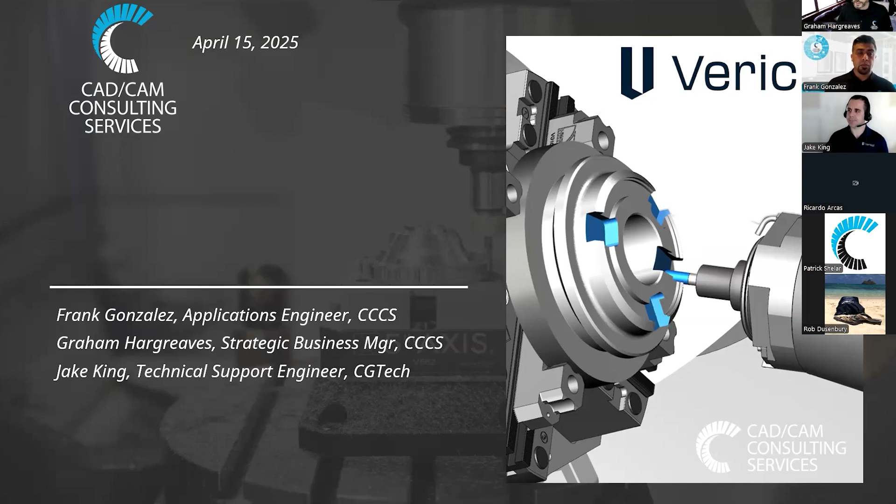Okay, so today we're going to talk about Vericut, Vericut Force, Optimizer, and how Vericut works with Mastercam. So we're going to do a little intro and overview, who we are, who Vericut is. Then we're going to jump in with Jake to talk about Vericut as a company and Optimizer. Then Frank will take the reins and start talking about Vericut and how it interacts directly with Mastercam. And then we'll do a little closer. So as mentioned, we're going to talk about all those products.

The thing that's very special about this is it's two proven industry heavyweights working together to help you achieve success in whatever you do in manufacturing. And we are offering these products locally through CAD-CAM Consulting Services. So a little introduction, Frank Gonzalez, he works in applications for us. Myself, I am the strategic business manager, and we have Jake King, technical support engineer with CGTech Vericut.

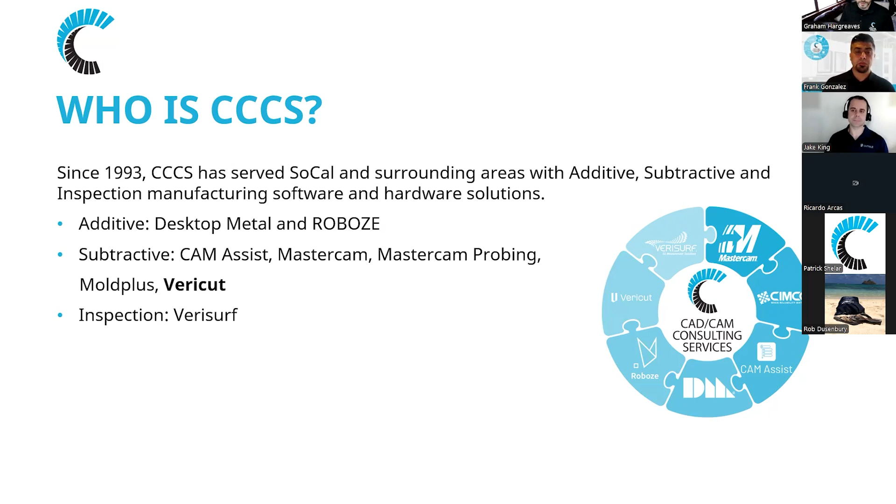Who is CCCS? We've been around since 1993 in Southern California and surrounding areas. We're providing additive, subtractive, and inspection software and hardware solutions for manufacturing. On the additive side, we have Desktop Metal 3D printers and Roboze. On the subtractive side, we have CAM Assist, which works in Mastercam. Also Mastercam. Mastercam probing, which if you see the little icon over here on the top right, that used to be CIMCO, but it was just acquired by Mastercam recently. We also sell Moldplus and, of course, Vericut. Then on the inspection side, we have Verisurf.

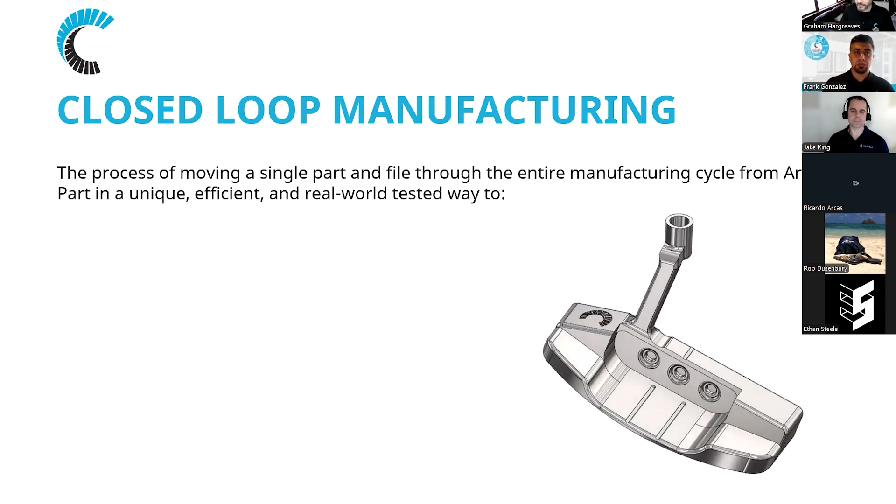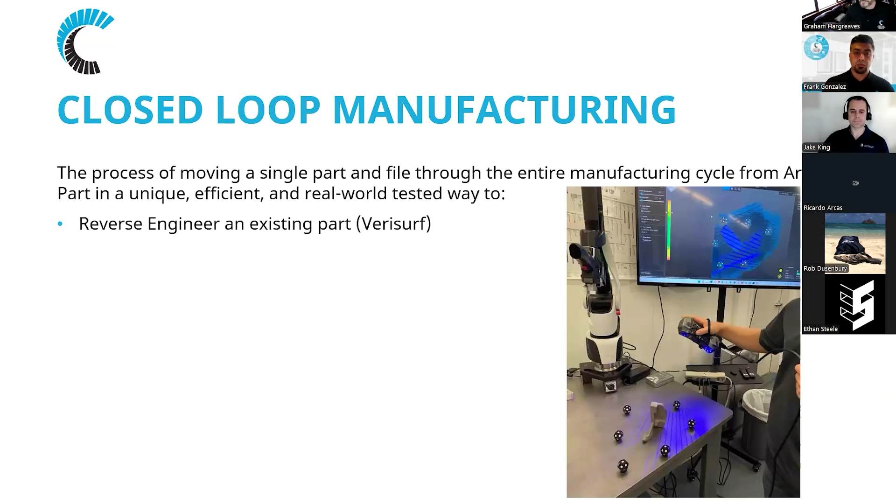So real quick before I pass this over, I wanted to talk about our closed loop manufacturing concept that we've kind of been rolling out over the past year. It kind of encompasses all of our products, and it's taking a single part and file through the entire cycle of manufacturing from art to part. It's a unique, efficient, and actually real-world tested way to take all these products and apply them. So with that putter that you just saw, we reverse engineered it with Verisurf. We actually made some changes and then printed it in stainless with Desktop Metal. And then taking a look at what Roboze does, they print plastics and super polymers, like carbon-infused polymers.

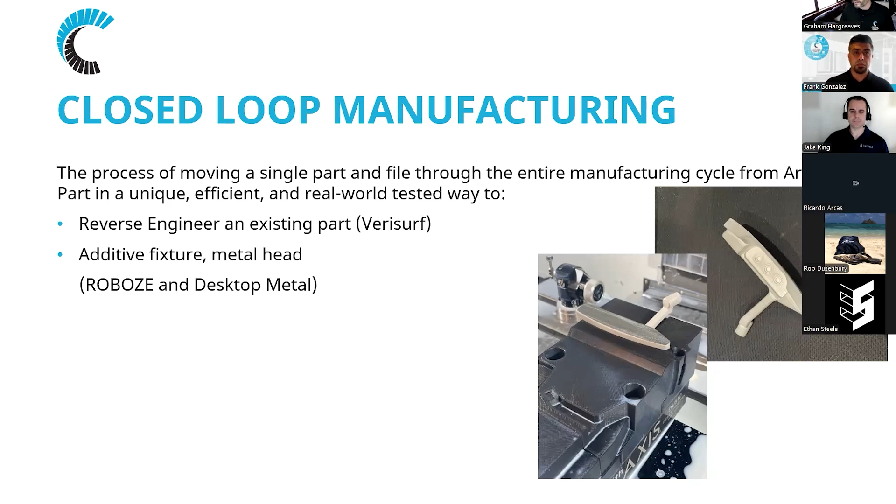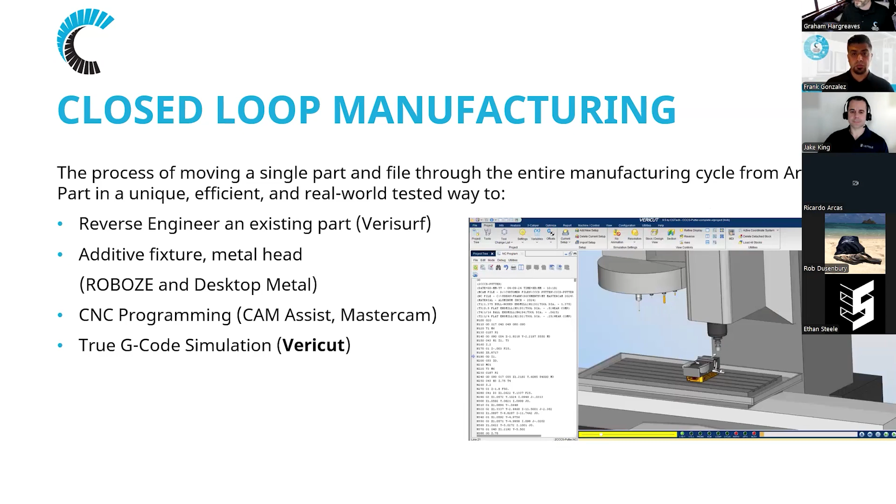Sometimes you need some interesting fixturing, and that could be tying up your CNC machine. So we took carbon PEEK and made some fixturing to hold that unique shape of the putter when we wanted to finish it. It held on really well. It has pretty good tensile strength in that material. So then obviously we program this in Mastercam. We can do our preliminary programming with CAM Assist. We bring it into Vericut for our simulation to make sure we know exactly how it's going to run on the machine.

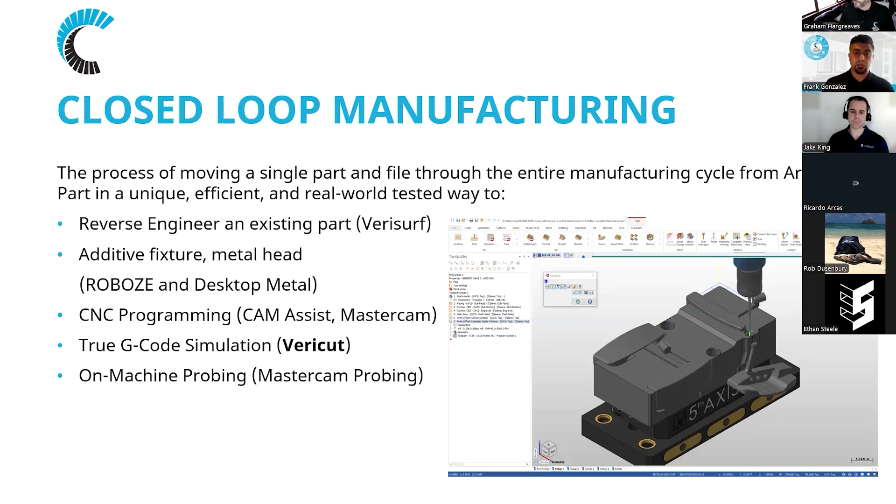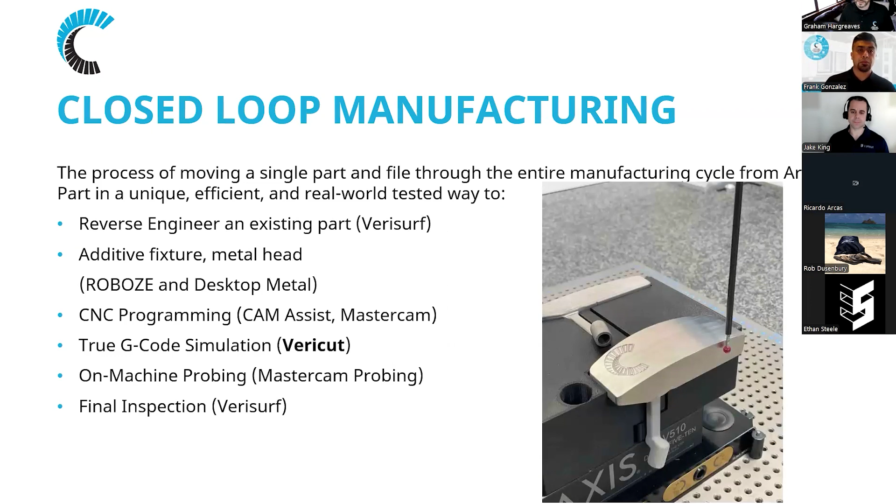And before, during, and after, probing was done with Mastercam probing, formerly CIMCO. Then once we were done, as you can see, these are real pictures. We definitely did this. We did our final inspection with Verisurf to make sure everything was good, and we can go and hit the links with it.

So one caveat there, this will not make you a better golfer. It did not make me a better golfer, but it is really cool. And I love it in my bag.

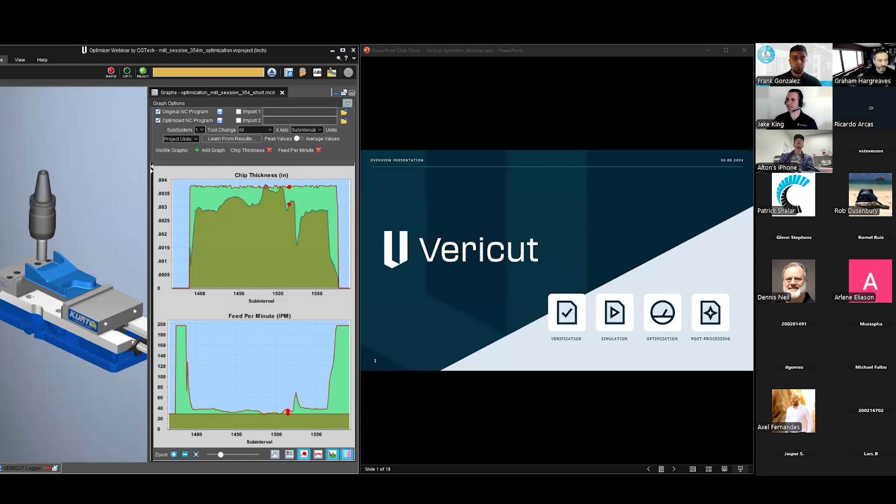Now I'm going to stop sharing my screen, and I'm going to pass it over to Jake. Okay, and away we go. Let's see. All right, you can see it? Yes. Okay. So let me hit reset here.

Okay, so thank you, Graham. I'm excited to be here. Excited to work with CAD-CAM Consulting. I've worked with Frank for quite a while. This is an exciting day for us. This is an exciting product that we're now offering, and so we're excited to get the word out there. I'm going to go through and explain kind of who Vericut is and kind of explain this product and see if it makes sense for you guys.

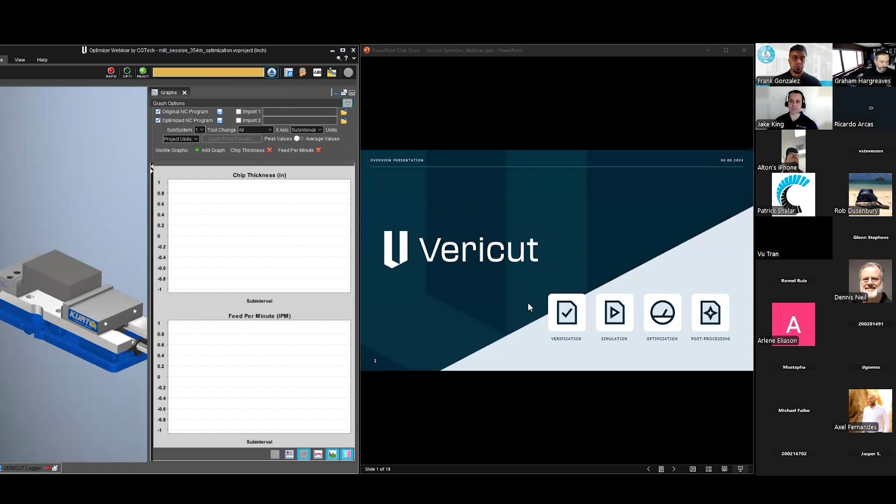So who is Vericut? Vericut, we were established in 1988. So our home office, our headquarters is in Irvine, California. So right down there in Orange County. A lot of you guys are familiar with that area. We have about 220 employees. We have offices in 12 countries. So we're a worldwide company. I'm not going to go through each one of these, but that's just to kind of illustrate that we are growing and we continue to grow every single year.

That bottom right hand section there where it says partner with CNC Software for 20 plus years. We also work with all the different CAD-CAM systems, and we're happy to work with those guys. We're happy to work with the CAD-CAM softwares. We need those guys to work with us. And so we're excited whenever we get to work with somebody or partner with somebody. We always appreciate those relationships.

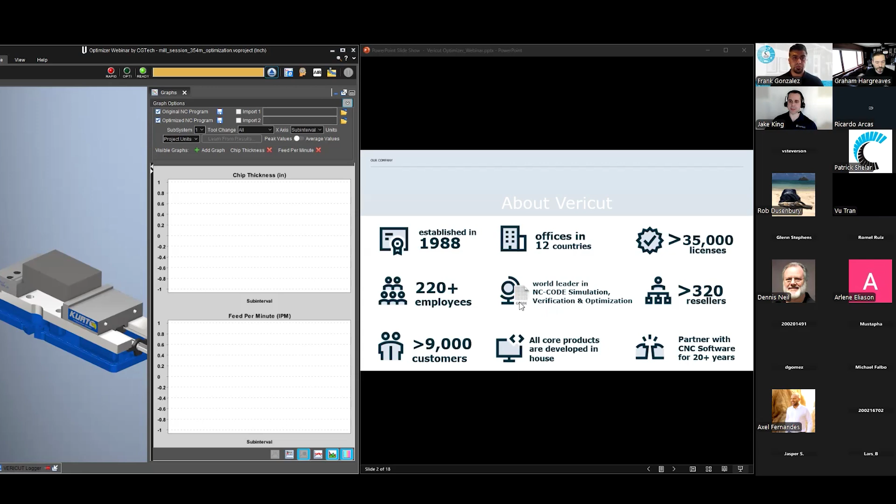Jumping into the products of what we offer. So this far left-hand side where it says Vericut Optimizer, that's what we're going to be talking about today. And I'll walk you through what that looks like and how that would fit into your process flow. The next one is Vericut. So Vericut is the core of who we are. We are Vericut. This was our first product that we made, and it continues to be a strong point for us. We are all about simulating CNC machines, and a lot of that happens inside of Vericut.

The next product that you maybe have not heard of or are not familiar with is VDAF, so Vericut Drilling and Fastening. So imagine some of these robots that are drilling holes and then they're placing fasteners inside of those holes, things like rivets for airplane wings and things like that.

The next one we have is our Vericut Composites applications. So these are growing as well. We have our VCP, so our Vericut Composites Programming side of things, and we have our Vericut Composites Simulation. So this side would be more like your post processor and you're programming these composite machines. And then this side is kind of like Vericut in that we're simulating all of that code that you're feeding into the machine to make sure that everything simulates and verifies correctly before taking it to that machine.

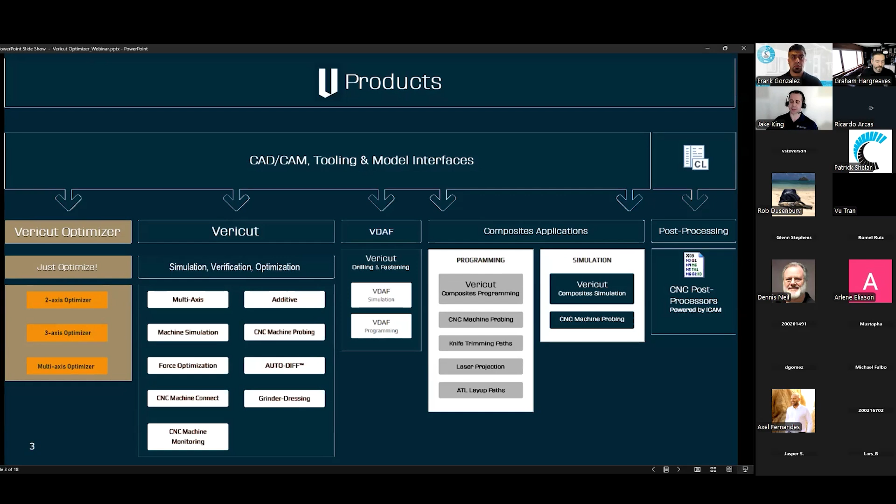The last product that we offer is our post-processing. You can see down here at the bottom, this says that it's powered by ICAM. So we acquired ICAM. So now our Vericut Post, we're able to post using that ICAM software. And so if you guys are interested in that, that's another option that we have where we have a lot of cool technologies where we can post using that software.

Okay, so Vericut Optimizer. This is what we're here for. So it's a standalone application. It's meant just for optimizing, so it's meant to be an ease of use software. It's for everybody, so any sort of CAD-CAM system, as long as you're running G-code, we can optimize it. It's meant to be an affordable option for you, right? That kind of goes back to that no Vericut needed. You don't need to buy a full seat of Vericut. You can just buy Optimizer and optimize your programs.

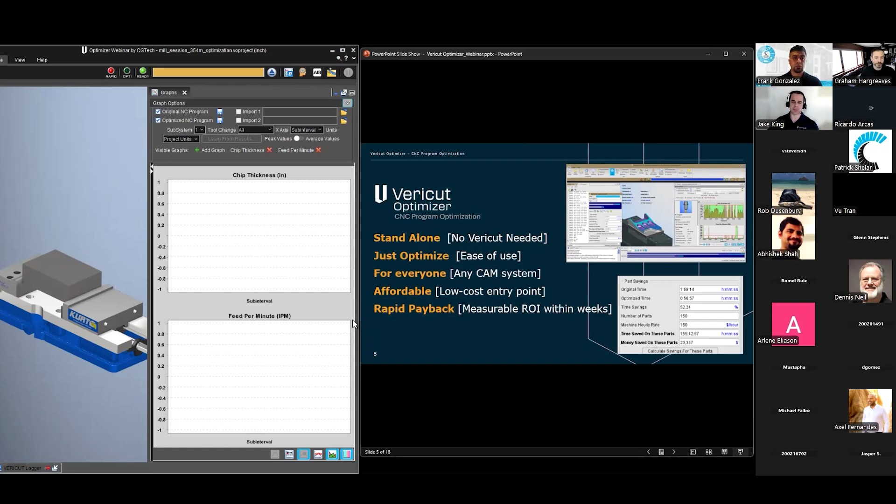And the last part that I'm going to talk about at the end of this presentation is this rapid payback. It's not too often that we come across products where there's a real measurable difference where you can measure how fast a product's going to pay for itself. And this is one of those products where you'll be able to see how quickly it pays itself off.

I'm not going to read through all these bullet points, but the main thing I wanted to show you is that you can optimize APT code like CL data for Mastercam—that would be your NCI code—or you can optimize G code. Any G code you're getting out of Mastercam, you can take into Vericut Optimizer and optimize it. It doesn't have to be new or old programs. If you've got a program that's been running on the shop floor for years and you're looking to get more performance out of it, this is a great product for you. If you're looking to optimize your programs before you even take them to the machine, you can do that too. We accept all G code, new and old—it doesn't matter, we can still optimize it.

Down here at the bottom it says we've got detailed tool use and graph windows. I'm going to show you what that looks like inside of Vericut Optimizer.

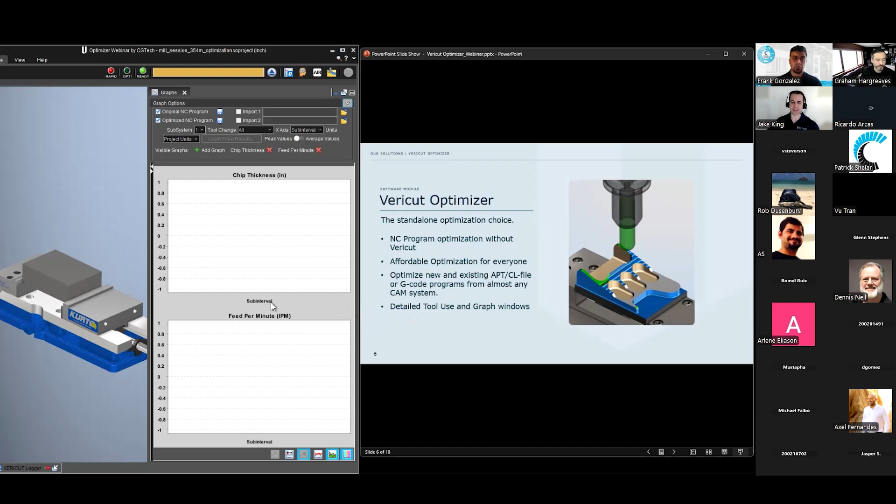So why is optimization needed? This is a great conversation. One of the coolest things about my job is that I get to help teach people concepts or things they may not be aware of. This is one of the neatest things inside Vericut and Vericut Optimizer—these graph windows. As we're cutting inside Vericut and Vericut Optimizer, we're able to take measurements all along the way and give you that data back. This is a good tool for you to get feedback on how your programs are doing and where you're at in your programs.

So think about this part right here. I've got this aerospace bracket up on this part of my screen, and you can see this end mill—this is looking from the top down view. We're going to go around this part and finish it, or maybe we're roughing, doesn't really matter. We'll see a thinned chip thickness up here on the straightaway, as we go on the outside edge.

And then what do we do? We bury that tool in this first corner and bury it in that second corner. There's not a real good way to fix this, right? We kind of have to finish that part—that's how we finish it, or that's how we rough it out. As we bury that end mill into those corners, we see this big load-up on chip thickness. So what that's doing is beating up our tool. We might see chatter, we might break a tool—we're stressing that tool out in those inside corners. So what do we end up doing? We end up picking a feed rate that satisfies that worst case scenario. We take the feed rate and bump it down, and we're like, okay, it made it through those two corners, and that's the feed rate we chose.

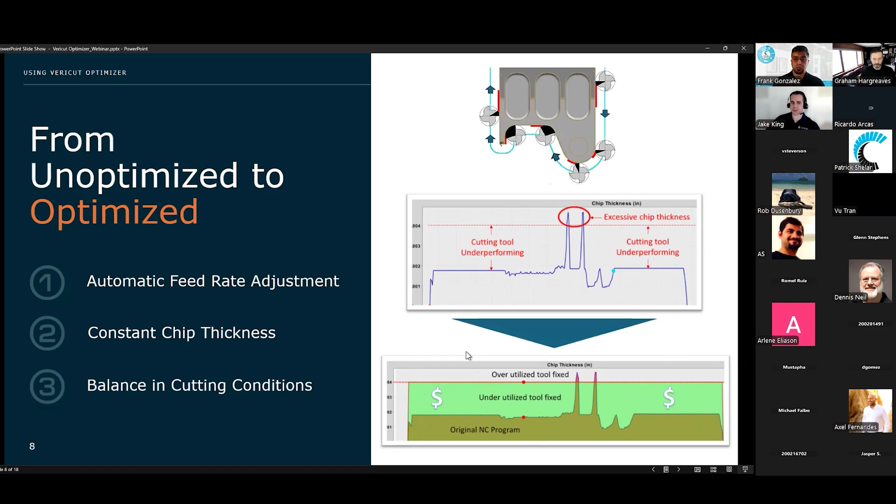So in Vericut Optimizer, you can see down here I've got these dollar signs. If we could push that chip thickness up to like that 4 thousandths chip load throughout the whole program, wouldn't that be great? Wouldn't we be able to get a faster program? That's exactly what Optimizer is doing, and I'm going to show you guys exactly what that looks like and how it works.

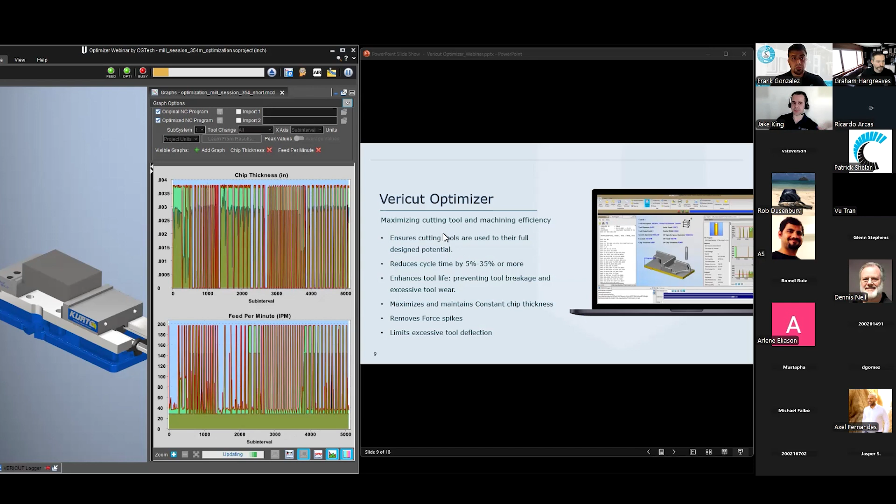Okay, so I'm going to go ahead and kick off this Optimizer right here, and you'll see these graphs populating. Some of the key points with Optimizer, and with machining in general, is we want to make sure our tools are cutting at the top end. If a tool manufacturer tells me an end mill wants a chip thickness between 3 and 5 thousandths, I want to be running in that range as often as possible. That's going to do two things for me: give me the best tool life possible in that range, and also give me the fastest program possible. So those are the two main points I want you guys to think about—chip thickness gives me better tool performance for the life of the tool.

And it also gives me a faster program, which I want. I want to get this part off my machine as fast as possible so I can make more of them or get on to the next job. We're all here to do the same thing—we're here to make money in those machine shops, and we do that by being as efficient as possible. And that's why optimization is needed.

We can reduce cycle times by 5 to 35%, and actually have seen more depending on the CAD-CAM system. If we have really inefficient programs to begin with, we can squeeze even more juice out of these programs. We can prevent tool breakage and limit excess tool wear on our machines by maximizing a constant chip thickness.

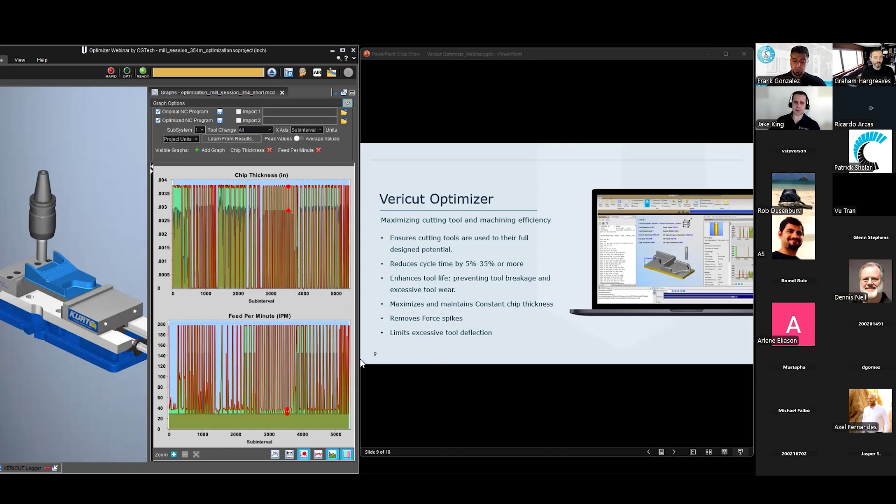The third big point I like to talk about with Optimizer is that we get to make safer programs as well. So I'm going to demo this for you and show you how we get this third benefit out of Optimizer. We can limit the amount of excess tool deflection, forces, and horsepower that we're seeing on our tools and machines, and I'll show you exactly what that looks like.

Okay, just to run through this real quick, this is a different way of thinking about your program, seeing it on a graph versus taking it out to the machine and listening to it or watching it run. This is what we typically see in our programs: I've got a feed rate of 25 inches per minute, constant throughout the cutting portions of the program. My chip thickness varies depending on the conditions my part or tool is seeing. What Optimizer is going to do is basically flip these two graphs.

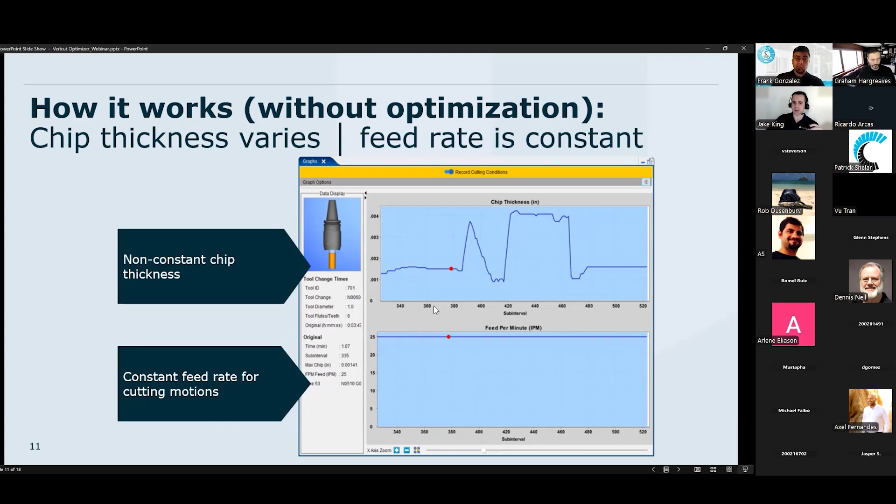Okay, I'm going to leave that up. I've already optimized this program. I'm going to jump into Optimizer and show you the same thing again to reiterate the point. I'll zoom in on this portion of the graph, and temporarily turn off the optimized portion. So as I was running this part, cutting it, this is the condition I saw - the chip thickness varying with a constant feed rate. I can slide this over here - a constant feed rate of 29 inches per minute with this particular tool.

Turn on the optimized and turn off the original for a second. It's not a perfect flat line, but it's very close. You can see as I drag this little red ball around, my inches per minute, my feed rate, is varying, but my chip thickness is more constant. This is what I'm after right here.

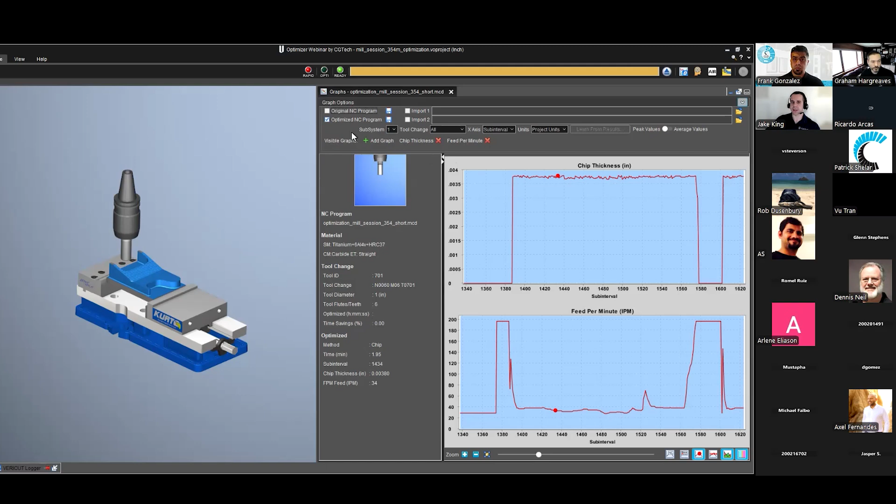If I show you both programs, top and bottom, overlaid on each other - this green section here is a gain, where I've been able to push my program up higher. If you see a section that's red, that's where it was pushed down. The green in between is gains - that's where we were able to go faster.

I was able to get that part off the machine faster by maintaining a more constant chip load, and also get better tool life by keeping that tool where it's supposed to be. If I run too low, I'm going to rub that tool too much and wear it out prematurely. If I run it too high, I might stress the tool out, put too much heat into it, and end up chipping, breaking, or wearing it out. So that's how we do it.

That's the whole secret sauce behind Optimizer - we are all about chip thickness. So keep that in mind when programming your parts or considering buying Optimizer. But there's more - remember that third leg I was talking about, where we can also make safer programs. Looking at this same section, I'll show you a bit more. Let's turn on power for a second.

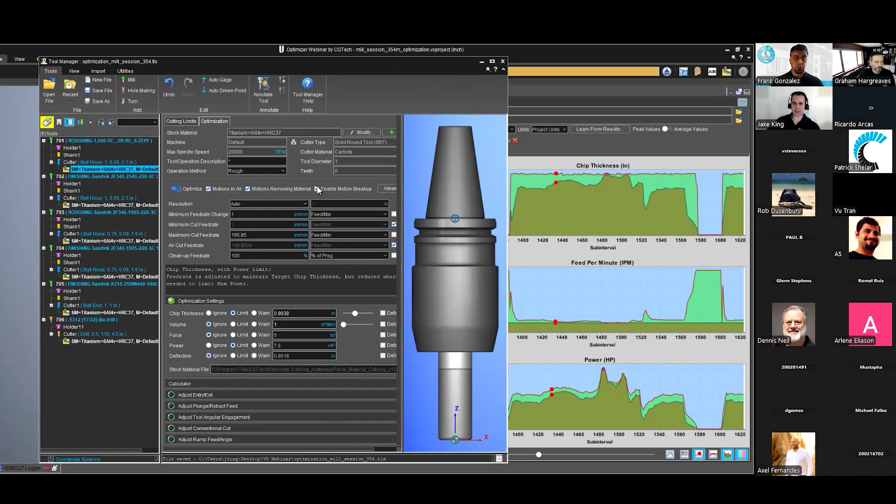Maybe I want to limit some of these spikes that I'm seeing in my program as well. So I'll go ahead, turn that on to limit, and set it to 7.5. Save that, and I'm just going to re-optimize this program real quick.

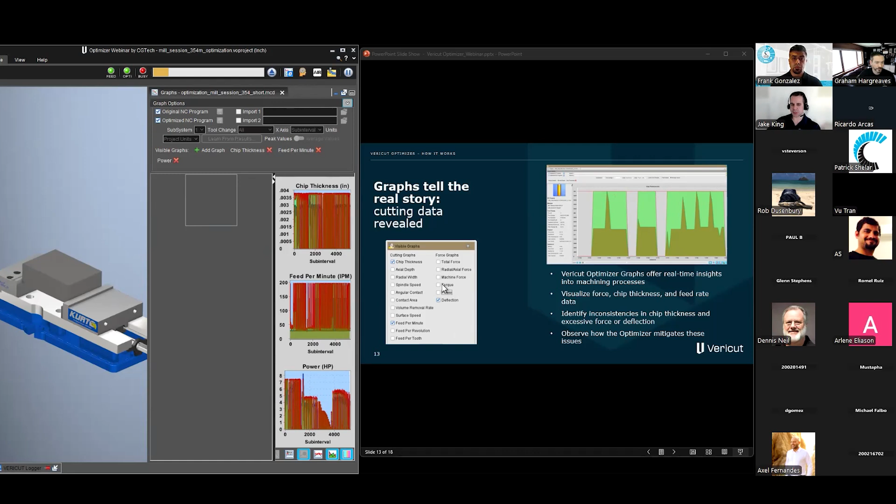And there's more. Inside those visible graphs, there's deflection, power, torque, machine force. You can split out the forces between radial and axial forces as well as total force. So there's lots of different options. You don't have to use all of them, they're all optional. Remember, our main thing that we're after is chip thickness - we're always driving after chip thickness.

If I turn on my limits right here, you can see where I've set these limits. Vericut is always going to try to push up to that limit, but it doesn't want to go over it. So we don't want to go over the chip thickness value I've set, and same thing with the horsepower.

So if I zoom in on the same section we were looking at, you can see I've got this limit right here. What did Vericut do? If I zoom in right there, you'll see - it actually cut my feed rate down in this section, which also drove my chip thickness down temporarily. But it made a safer program in that now I'm not pulling so much spindle load when cutting in this section.

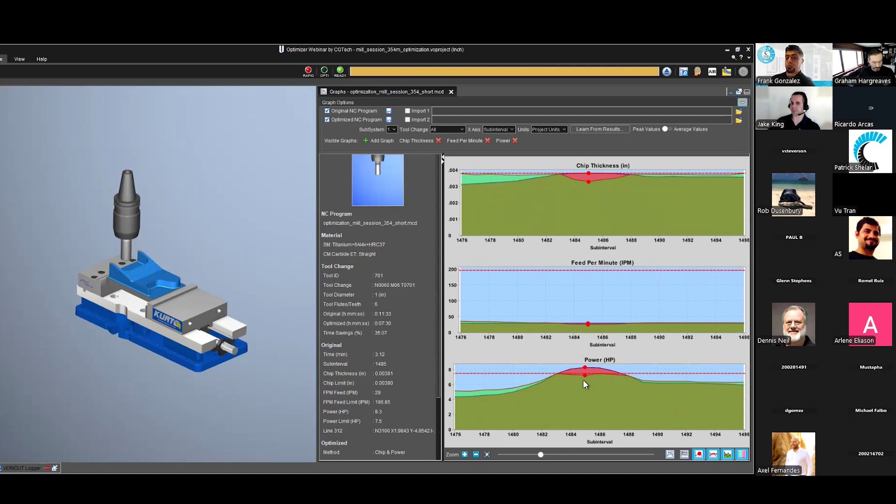If I back out and zoom out, I was still able to see lots of different gains in here. If I turn on my optimization calculator, you can see I was still able to save 35% cycle time on my program, even though I had this small section here where I cut it down. So that's the third thing we offer - that's how we get to a safer program.

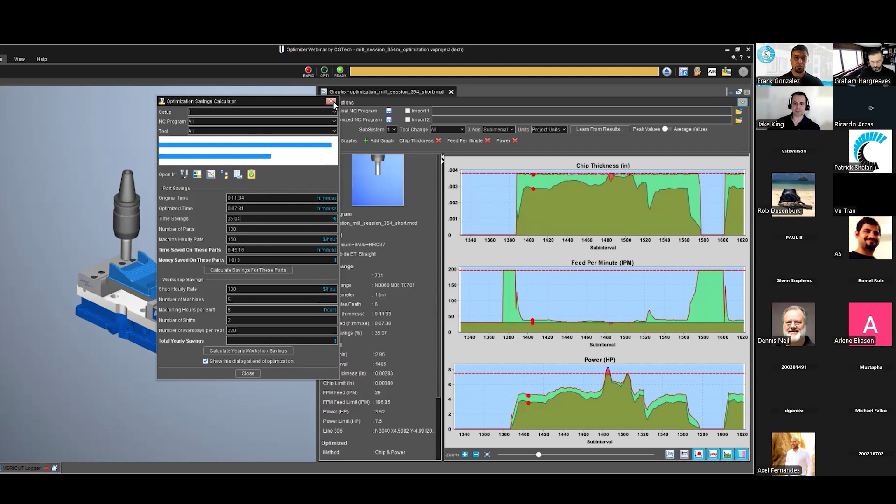So these graphs, I have to be careful when I talk about them. When I first started looking at these graphs, I thought this was really cool - I still think it's really cool. It's something where nobody has shown you your programs like this before. You can run them on the machine, simulate them in Mastercam, NX, CATIA, whatever. But nobody is showing you these graphs like this or showing you this data. It's kind of looking at your programs under the microscope.

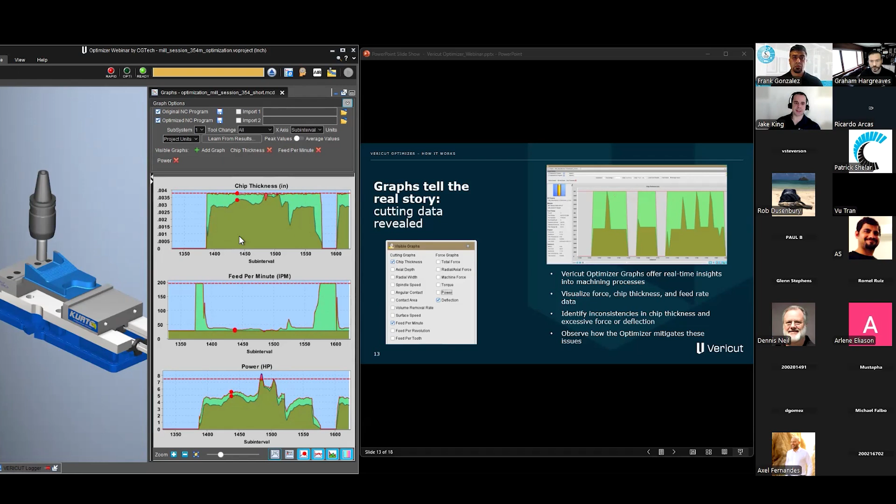And still today, what's really amazing to me is that while we were doing that, while Vericut was running around cutting this part, it was measuring and writing out a new optimized program. So let me go forward here - I talked about this, limiting the forces, the power, the tool, the deflection.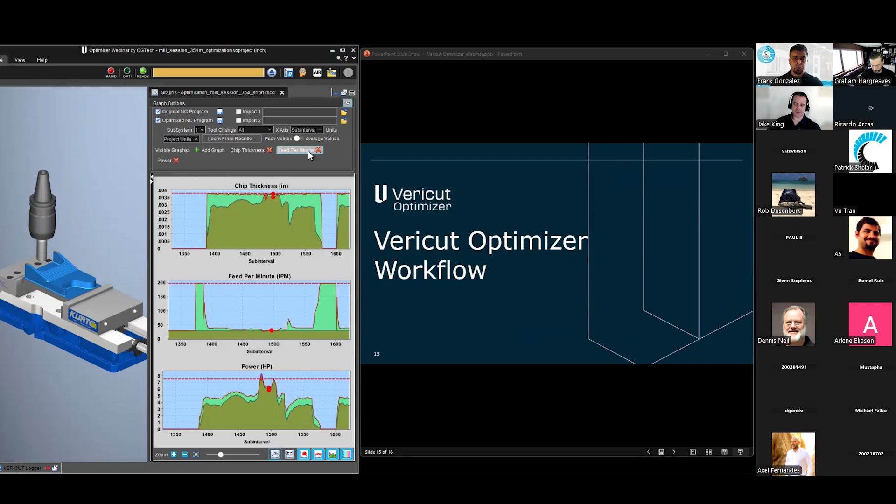Well, and that's another thing too - let me show that real quick since I talked about it. So maybe if horsepower is a harder thing for you to visualize, maybe you look at it more like deflection. If I turn on the same graph in this same area, you can see almost 2/1000ths of deflection at the tooltip is what I was seeing in this particular region here.

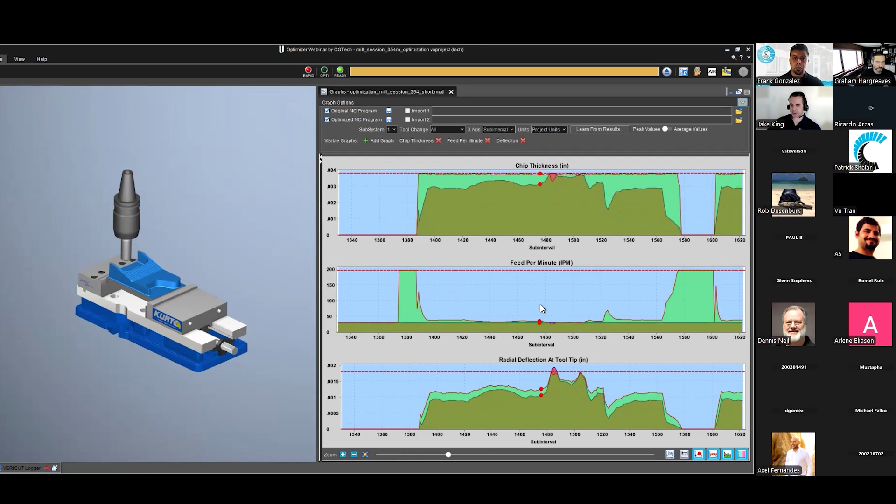I could go back into Tool Manager, and I don't have to use horsepower - I could ignore that and turn on deflection, use this limit I've set up here, and limit it to where Vericut's not going to go over that, 1/1000th, 8/10ths deflection at the tooltip itself. Lots of options. Like I said, we teach an entire class on how to do this and go through all these different settings.

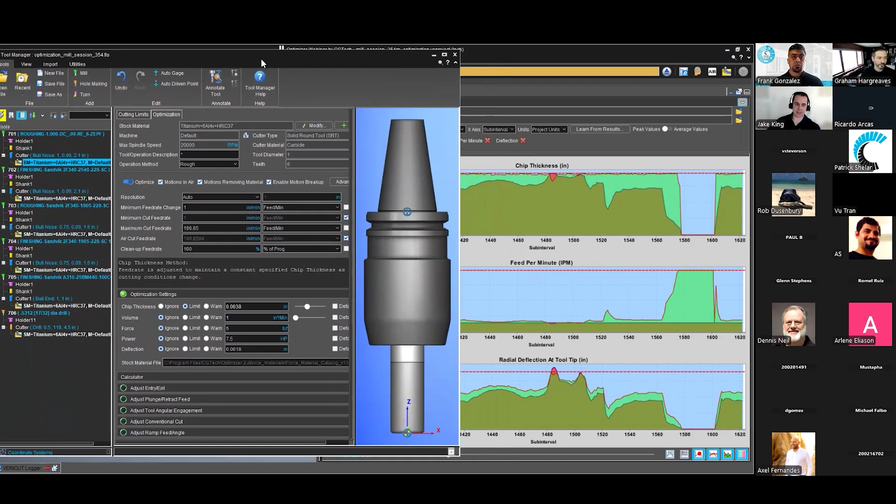Very intuitive, very easy to use.

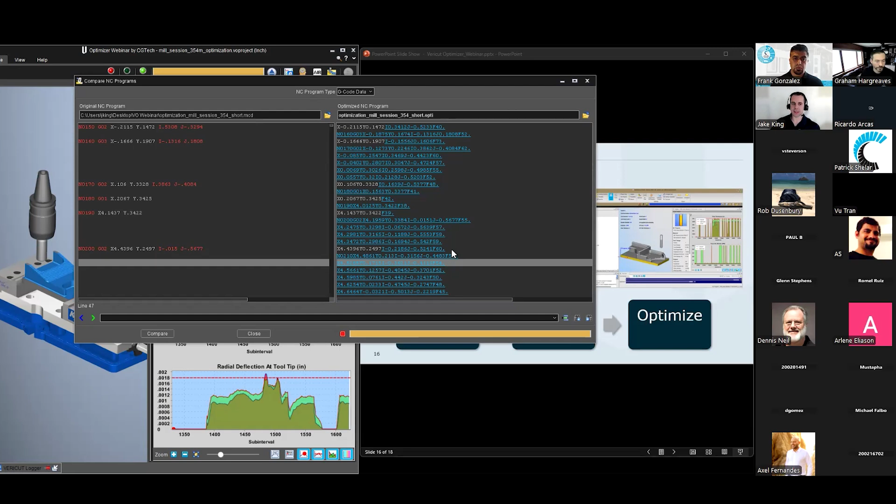That's all we're doing. We're not adding extra cuts. We're not adding in lead-ins and lead-outs. We're not changing the trajectory of your toolpath in any way. We have the ability to cut it up into smaller segments and then apply different feed rates. And we're applying the correct feed rate for the chip thickness that you've told us about.

Okay, so what does this look like for you guys, or how would this change your workflow if you were to use this today in your machine shop? Step one, we're gonna get all of our information out of Mastercam or whatever CAD-CAM system you're using. We've already defined these tools in Mastercam. We've already defined our stock and our fixture inside of Mastercam. So we're not going to redo that work. We're just going to take everything from Mastercam and take that over into Vericut Optimizer.

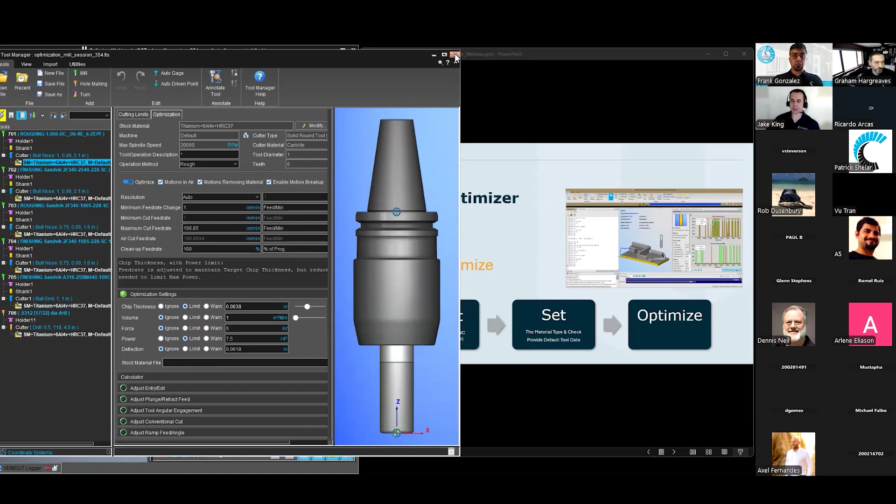Once we've done that, we need to tell Vericut what material we're using. So if I go back into Tool Manager, in order for Vericut Optimizer to correctly calculate the force, the power, and the deflection, you need to let Vericut know what material you're cutting. If this was something like wood, you can imagine the horsepower or the deflection would be much less than something like titanium. So you'll tell Vericut what material you're cutting, and then after that, you'll click on that optimize icon.

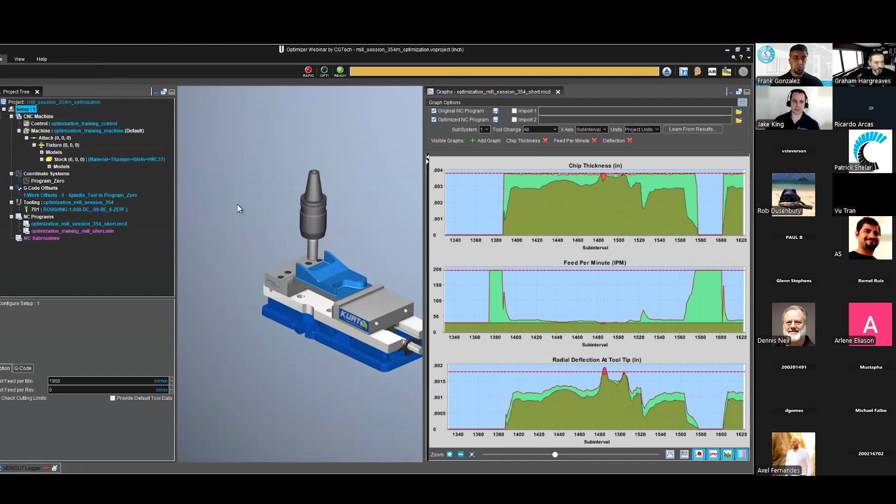So just to run through it real quick. I'm going to show you guys what we call the project tree. I get all of my information from Mastercam. I get my tools from Mastercam, my fixture and my stock from Mastercam. I'm going to post my program just like I normally do. I post it out of Mastercam and then let Vericut Optimizer know where that program is at. The next thing I need to do is let Vericut know what material I have.

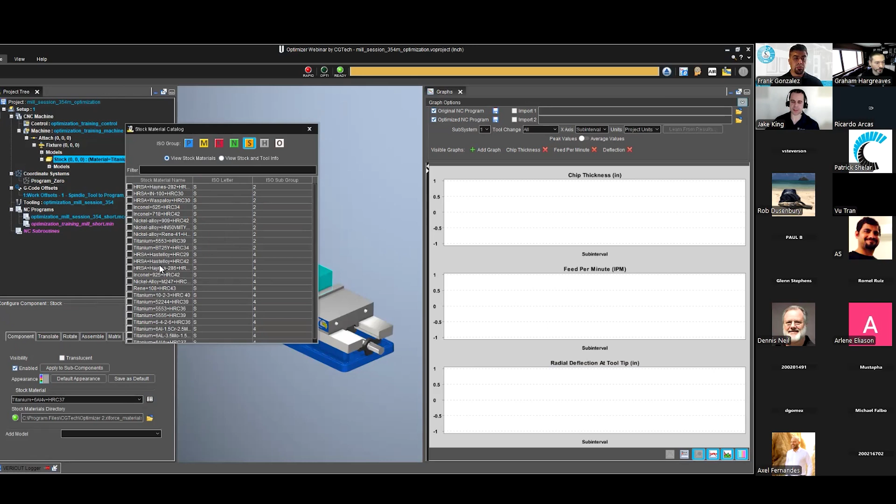So in here, we've got a big long list of materials that you can choose from. I prefer clicking on this icon here. In here, I can sort these materials by their different groups. So I could go to something like my aluminums and pick which aluminum it is, or if it was a titanium alloy or something like that, I could go pick my material. Once I've let Vericut Optimizer know what material I've selected, I'm going to click on the optimize icon and start optimizing my program.

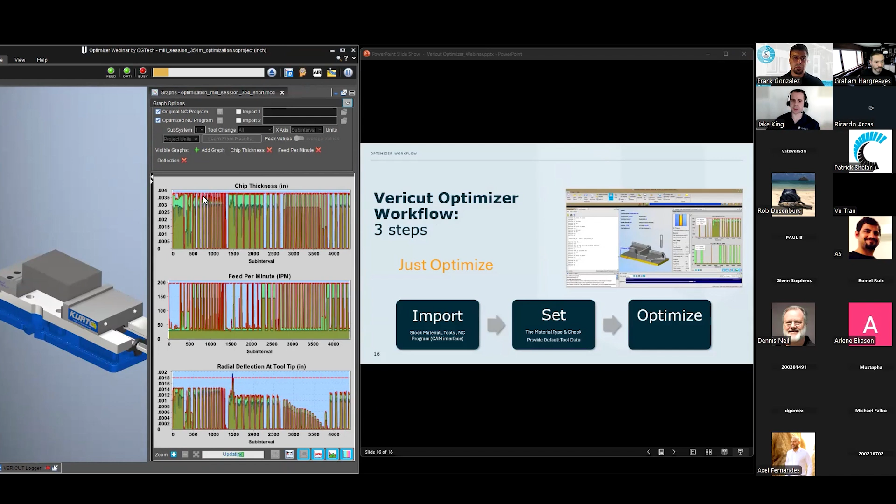Any sort of changes that I need to make, I can go back into Tool Manager and change those different settings like I showed you guys how to do. So maybe I want to push this chip thickness up more. I've seen this a lot with users where they'll optimize the program and they'll say, hey, that ran pretty good. We're able to get a lot more performance out of the tool and out of the machine. Let's push it up a little bit more, right?

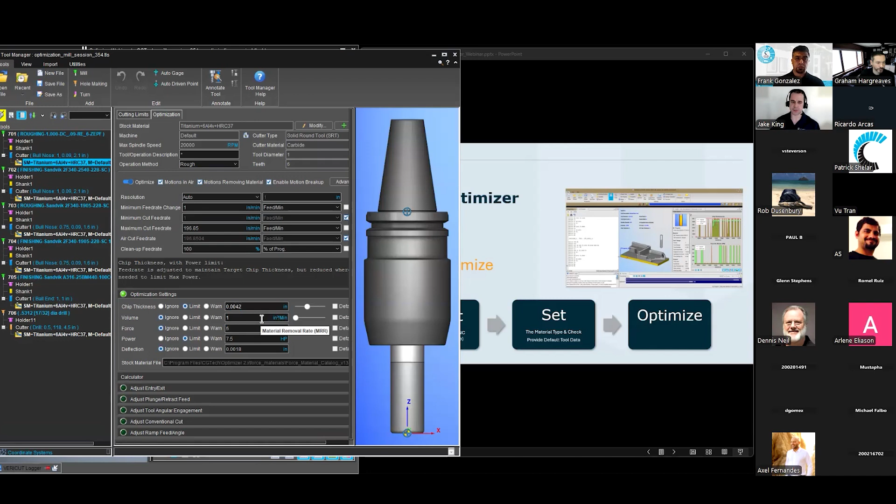So I could go back into Tool Manager and say, hey, it ran really great at that 3.8 value. Let's start pushing that up. Let's push it up to a 4.2. Save my TLS file, re-optimize it, and now I start driving that cycle time further and further downward, and getting more performance out of my tool and out of my machine. So as simple as that, 3 steps.

The last thing I wanted to mention to you guys is this return on investment. Like I said at the beginning, it's not too often where we come across these tools where you can very quickly see how much it's worth and how fast it can pay itself off. I've got a customer that I've worked with quite a bit that cuts a lot of titanium, and he mentioned to me, I can't believe more people aren't doing this, because this thing paid itself off for me in a matter of like a month. It's already paid itself off.

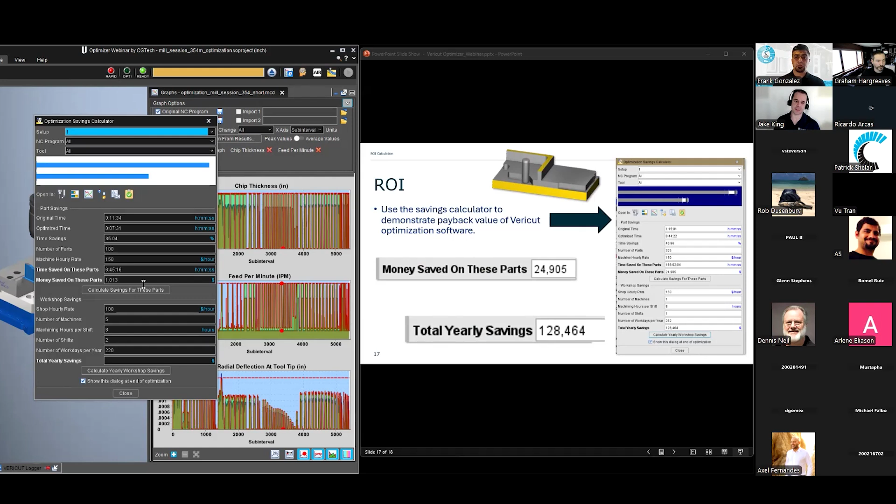But he was cutting a lot of titanium. So you can see my original time was 11 minutes and 30 seconds. And keep in mind, guys, that this is just a roughing end mill. This isn't the entire program. So if I have 11 minutes of cycle time, I was able to cut out 4 minutes. That ends up being about 35%.

If I cut 100 of these parts at $150 an hour, that ends up being $1,000 saved, very quickly. One thing that we forget to mention too is that that's almost 7 hours of free time that I get back, right? If this was on a three-axis mill, now I've got 7 hours, I've got almost an entire shift back where I can go make other parts with this machine tool.

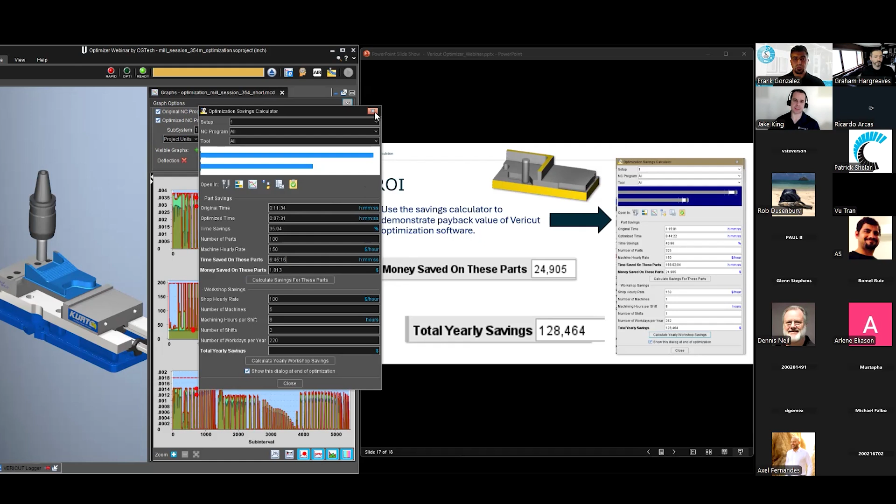So very quickly, this is a tool that can help you guys make better programs up front, safer programs as well. And it's something that can easily pay for itself. So pretty cool. I think it's really cool. I get really excited about our optimization software.

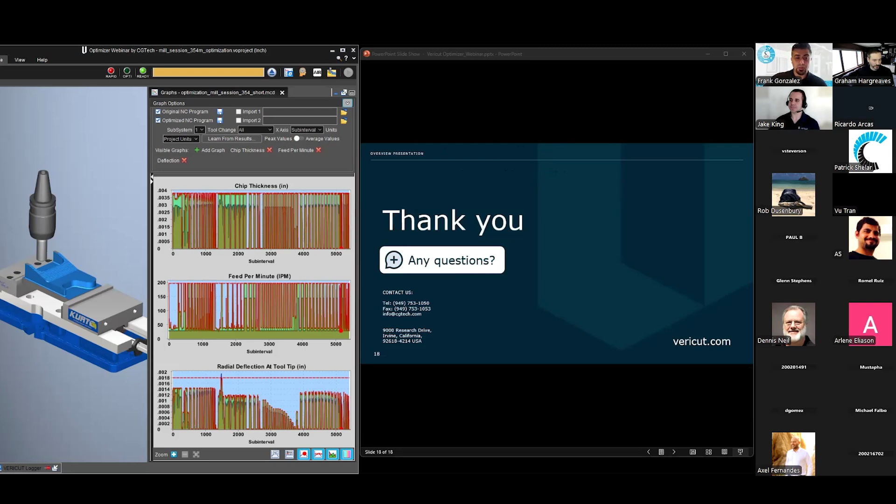So thank you very much. I'll pass the time back over to Graham or Frank, and Frank's going to show you guys the Mastercam to Vericut interface. All right. Thanks a lot, Jake. Yep. Thank you, Jake. So let me go ahead and share my screen. Move this out of the way. Are you guys able to see my screen? All good? Perfect. Yep. Okay, guys.

Well, yeah, so what I'm going to be showing is pretty much the workflow on how to integrate everything Jake just showed in Vericut, bringing it across from Mastercam in this case. This can be done with any other CAD-CAM software. But the workflow here in Mastercam would be the normal things you would do. Come to your stock or your job setup, and you're going to go ahead and define your master model, meaning what's going to be cut, your stock, right? So if I come to my levels, turn on my stock, you can see it in red. This is what's going to be removed, right?

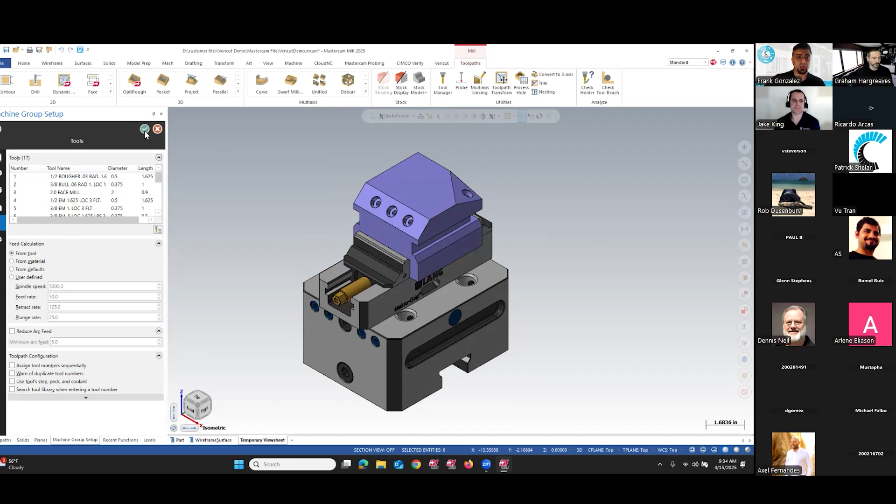And then the next thing we want to select is our work holding, our fixturing. In this case, I have everything. You can see it highlighted in yellow here in a level. And then along with that, your tool library. And this is a workflow that you guys should have already, right? But if you guys are using machine simulation or anything else, it's the same workflow. Go ahead and check mark that.

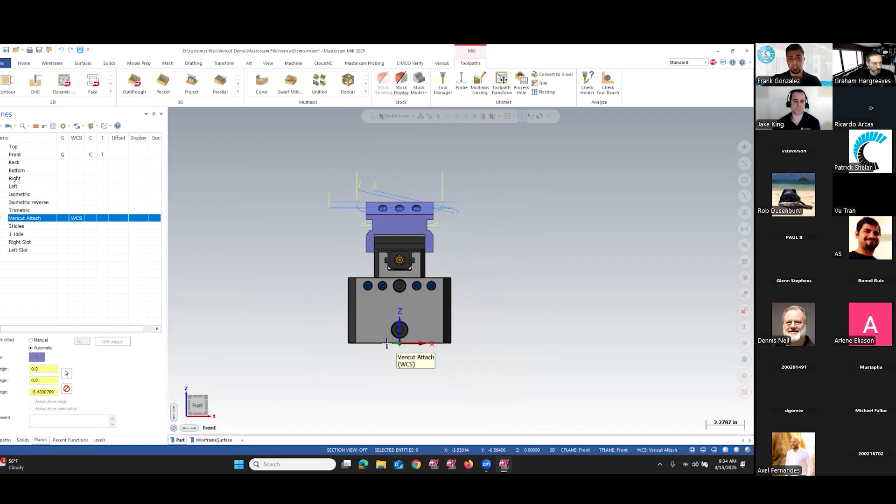And then another thing that's going to be required to be able to import this into Vericut would be creating a plane. So we would need an attachment plane. What that is, is just where do you want to place all our models when we bring this over into Vericut. And if you can see here, my attachment plane's right at the bottom middle of this nice picture. Perfect. Okay, so once we have that, that's pretty much all we need. And again, this is just the normal workflow that you're doing regardless, so nothing really different, right?

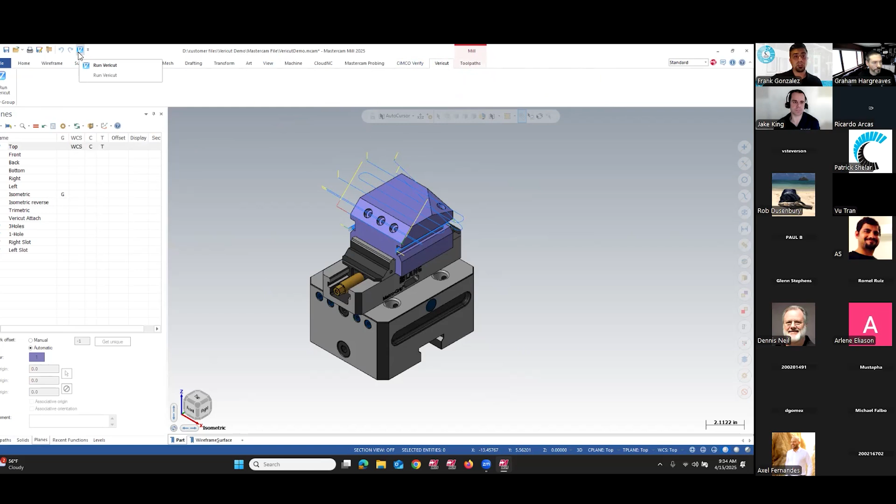And then we go into the Vericut interface, and you could have it in multiple places. I created a tab here for this demo purpose, and I also have it on the quick access toolbar here, so either one would work. So once you go into the Mastercam interface button here, this is what pops up, right? So it wants to know your working directory, so where your project in this case is going to be built. All this information that we're transferring over to Vericut, this is where it's going. And then you want to give it a name. In this case, I'm going to label it Vericut demo.

And then you also want to make sure that you select your project template, meaning what machine you're going to be using for this project, right? And then you just want to put all the operations into a single Vericut setup here in this case. And also, if you have multiple toolpath groups, you could select all or select one only. In this case, we only have one, so all or select only would work. And then we go down like this. The first tab here is a model.

So you'll see that everything that we did on the job setup, from our stock, our model, and our fixturing, everything's being transferred over. If for whatever reason you need to change this, you still can. You have control. You're able to come here, select, and either clear it, add from a different level, or go back into the Mastercam drawing area and select it. And it's the same thing with your design or your model, and then also with the fixturing. The next thing you're going to do here is go ahead and select your attach plane.

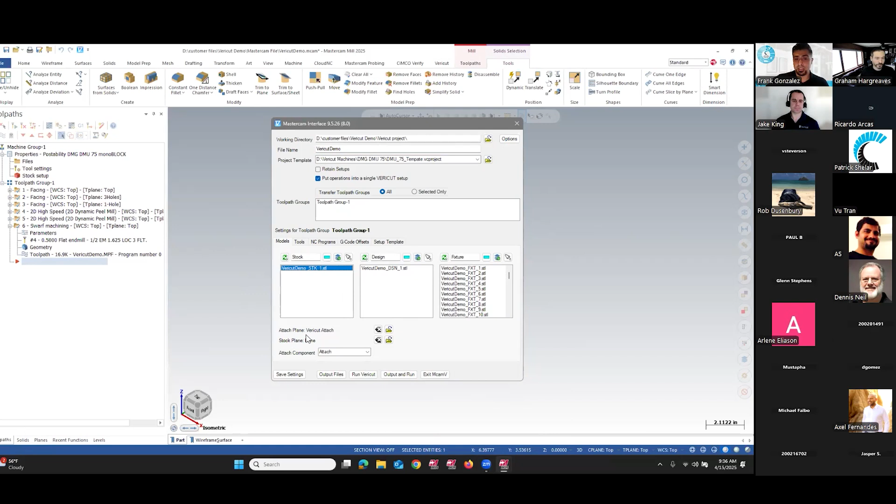In this case, we label it our Vericut attach. So you go in here and select your plane. After that's done, we go over onto the next tab, which is for your tools.

And as Jake mentioned, we've already done all the hard work, right? We already defined everything in Mastercam. So what I'm going to be using is just generate my tools from Mastercam. That's going to bring all my tools into Vericut. You can also use it from your template. So if you already have all your tools in the template in Vericut, then you can just use them from there, or merge them from elsewhere, or select them from an actual library.

After that, we go ahead and select our program. In this case, you can use the NCI for Mastercam or the G code. In this case, I'm going into my directory where I'm posting and selecting that G code. And then the next thing over would be your work offset. This automatically gets populated. This is just how you're using your work offset, whether you're using G54, 55, etc., or 1, 2, 3. So that's where it will start.

And the next thing over is a setup template. So if, after you're done running this part, is it going to be the leftover stock? Is it being run on another machine or another project? This is what you would do it.

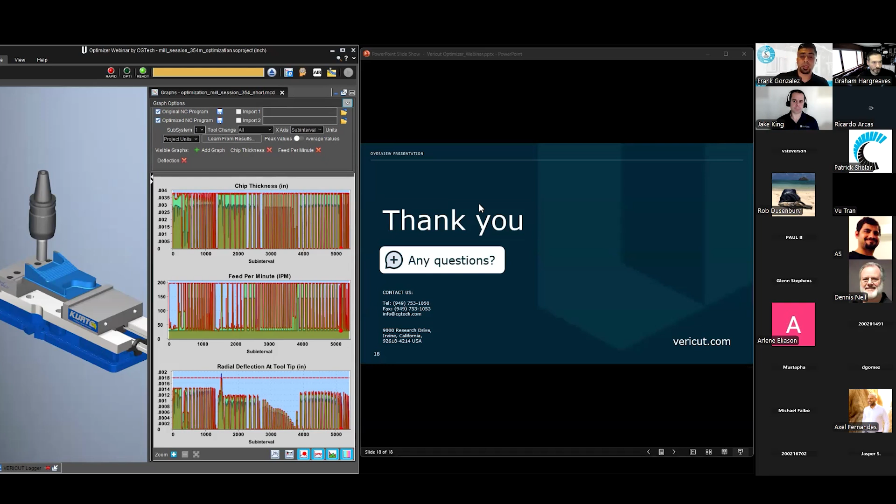Another cool thing here is that you can save your settings. Saving your settings will save all the information you just brought over, so you don't have to redo it. When you do hit that save settings, you would see in your Mastercam levels that it'll create a level called CGTech, pretty much saving that in the background.

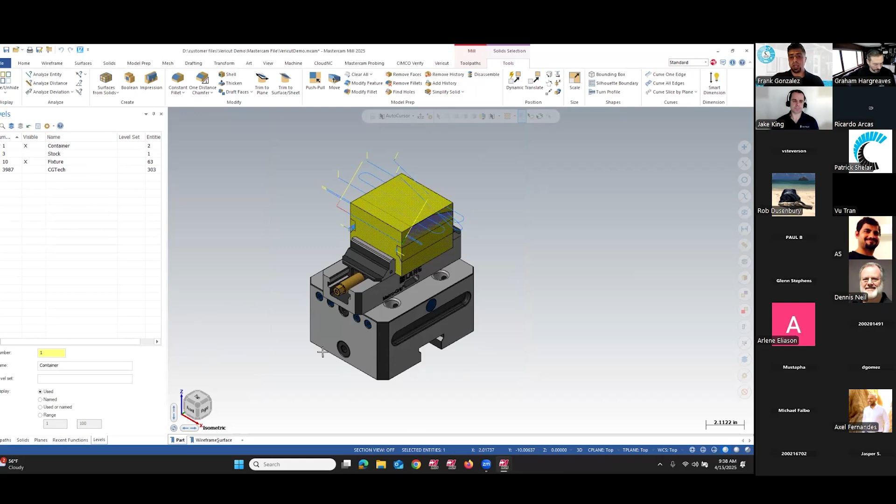So after we're done with this, we can go ahead and just hit output and run. So this is going to output all the information we just got, and then open up Vericut to run this. This is being live, so hopefully it doesn't delay or slow. And you'll see that it opens up and everything's been imported directly from Mastercam with our fixturing, our stock.

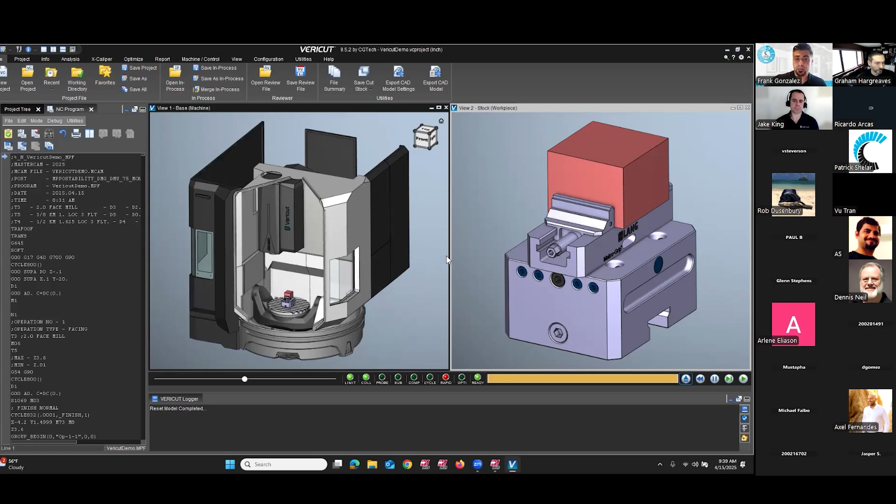You can see here we have multiple views. We have our machine view or our workpiece view. You are able to come in here and turn off certain components on the machine if need be under component visibility. So you can turn off your enclosure, inner enclosure, depending on what you want to see. And then we can see here, we have our program. I'll reset this and I'll go ahead and just hit play. So you can see the true G code being run on the machine.

If you guys have any questions, go ahead and type them in the chat while we see the simulation. We can go ahead and speed this up or slow it down as need be.

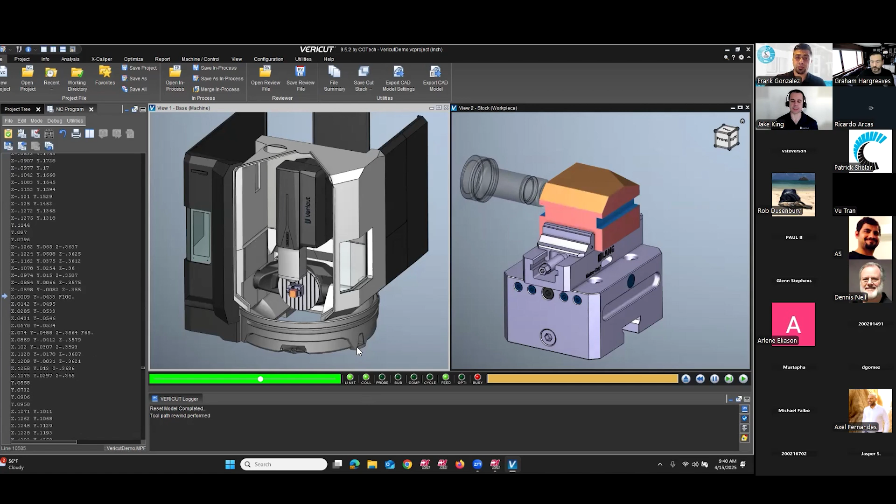Any questions? One thing that's worth noting, Frank, is that Heidenhain, Siemens, Fanuc, Fadal, whatever G code you guys can throw at us, we can simulate it. So as long as it runs on a CNC machine, we're able to simulate it. File extensions don't matter with the interface either. So if it's an MPF or .NC or no file extension at all, there's no problem simulating that kind of stuff inside of Vericut.

Sure. And like you said, we're reading the real G code, right? There's no games here. We don't have wireframe geometry or anything like that. We're reading the actual G code. Correct. Yeah, and that's pretty much it, guys. It's a simple plug and play. Again, you're not doing anything that much different than what you're already doing inside of Mastercam if you're doing it right. Going from the job setup, other than just the attach plane, give it a little bit of information, and then you're ready to verify it, make sure everything's going to be good on the machine, right? No crashes, no nothing.

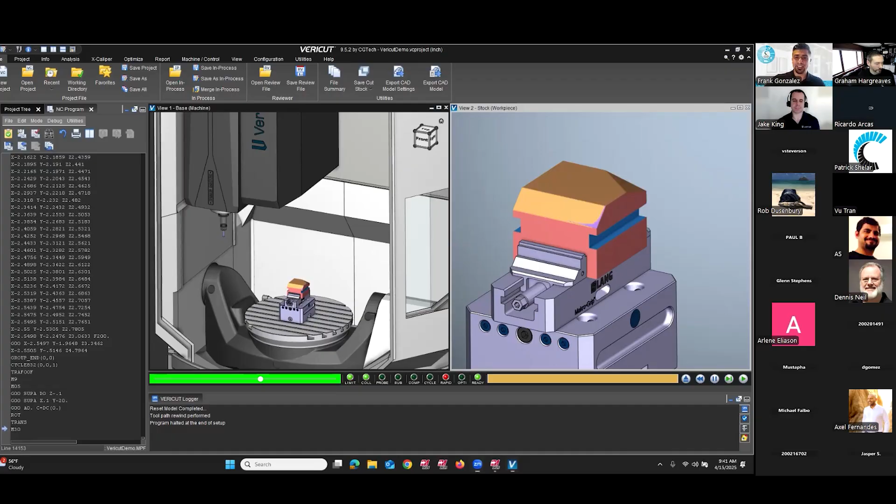So, questions? Go ahead and stop sharing my screen. Is there anything you would like to add, Jake or Graham? No, I thought that was excellent.

So just to point out that Frank showed you guys the Mastercam to Vericut interface. We use the same interface for Vericut Optimizer. It's just a little bit more simplified, but it's the same interface. And the idea there is just to make it easy. No need to do the work again. Just grab all the information out of Mastercam and then push it over into Vericut Optimizer or Vericut.

Perfect. As I'm sharing my screen here, one thing that really stands out to me is, full disclosure, I'm not a CNC machinist. I'm the marketer. I stayed at a Holiday Inn Express last night. Been around the industry for about 20 years. I can fool around in Mastercam. I can certainly talk about it. Same with Vericut, but you guys definitely made it seem a little less daunting than my time in these pieces of software. So well done.

Can everyone see my screen? Yeah. Yep. Perfect. Okay, I'm gonna wrap it up.

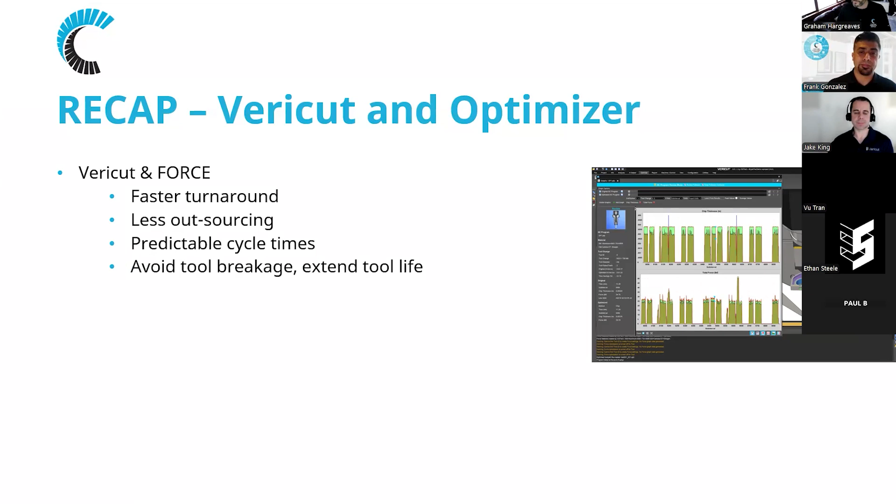So just quickly, Vericut Force. It's going to give you a faster turnaround, less outsourcing, predictable cycle times. You're going to avoid tool breakage and extend your tool life. On the optimizer side, it's a standalone product. You don't need Vericut verification. Certainly affordable. Optimizing feed rates and maximizing your chip thickness, as was shown.

And then Vericut, it's simulation, right? It's reducing your errors and your crashes before they happen on the machine. It's improving your efficiency. It's saving you money. The ROI example Jake gave was perfect with his customer with titanium. Nearly any CAM system, we'd certainly appreciate it if you were a Mastercam user, but if you're not, we're obviously still going to talk to you. And then the reductions in machining time are there. You can see them through what was shown.

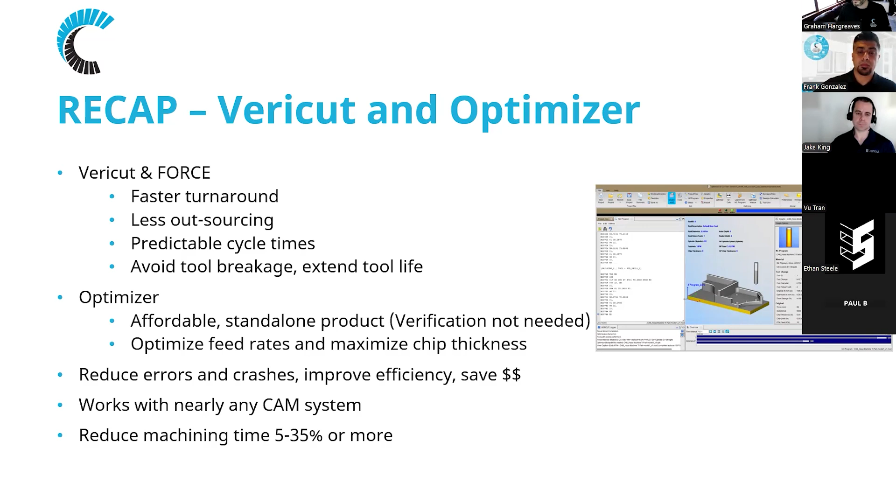So then you bring in Mastercam, and it's a relatively simple process. You're generating your code in Mastercam. It's your familiar interface. There's such a tight integration between these two products that it really benefits the user. So next you're taking what you have in Mastercam, all that code, all the supporting information, you're bringing it into Vericut, and you're running it, and you're making any adjustments that you need to make. As Jake said, before you're going out there and listening or watching it cut, if you're a seasoned machinist, you can hear what's going on in the shop floor, even if you're not out there.

In my time at Mastercam Corporate, we always say, we're a CAM company. We're here to help you cut your parts. We leverage and rely on relationships and partnerships like this. Vericut is the best at what they do. Mastercam is the best at what they do. So utilizing that and putting it in your toolbox is just going to make you the best at what you do.